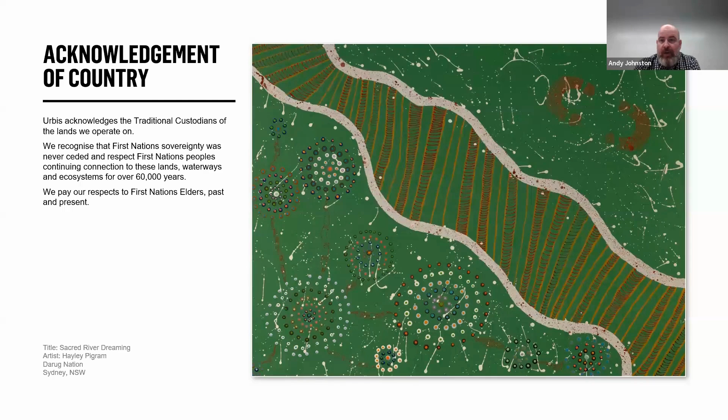So who are we? Hello everyone, my name is Supun Perera. I'm a senior research fellow at the Institute of Transport and Logistics Studies at the University of Sydney. I'm currently leading a project funded by Transport and Main Roads Queensland called TRIPS, where we are developing a national database for land use trip generation surveys. I have around 15 years of experience in the transport industry in both private and public sectors. I have previously worked at Transport for New South Wales and Stantec. I have also worked in the transport advisory teams at Urbis in both Sydney and Melbourne.

I am very much excited to be a part of this discussion today with Andy. This topic of how we transport waste is becoming increasingly relevant in light of the housing crisis we are facing in Australia at the moment. It actually gives us the opportunity to rethink how we traditionally do things and to plan and optimize transport infrastructure to achieve the best possible outcomes, particularly relating to density. So I'm looking forward to sharing our insights and getting your feedback on this topic today.

Thanks. And I can't plug the good work that Supun's doing enough. His national trip database will make all our lives so much easier and provide data at our fingertips.

So I'm a big supporter of what he's doing. I hope you guys keep in touch with him and follow what he's doing pretty closely.

My name's Andy Johnston. I've got 20-something years of experience in traffic engineering and transport planning in both the UK and Australia, most of that time in Australia. I lead the Queensland Transport Advisory Group at Urbis, and this is something we deal with on a day-to-day basis, whether it's smaller projects or huge master planning projects. It's something we need to think about and how we actually deliver solutions for the community.

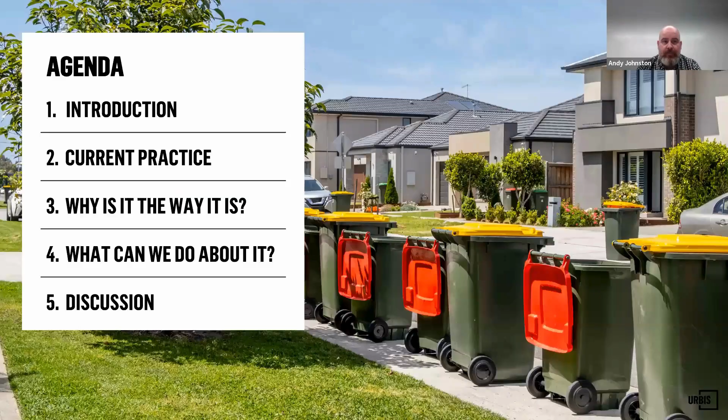We have an exciting agenda for today. We'll first set the scene, exploring how waste management fits into the bigger picture of land use planning and why it's such a crucial part of development. Next, we'll look at current waste collection practices using real project examples to understand how and why things are done the way they are. From there, we'll dive into challenges and limitations of these practices and explore opportunities for improvement. Then we'll discuss our recommendations and future directions, looking at practical ways to improve efficiency of waste collection while balancing other planning priorities. Throughout the webinar, we'll be collecting your insights via online surveys, and if time permits, we'll go through some of the results at the end. Otherwise, we'll collect and incorporate your feedback into our ongoing work, and we'll keep you in the loop via AITPM communication channels.

So why are we here? This has been a bit of a burning topic for Supun and I, and probably a lot of you as well. We design our precincts, our buildings, everything around our waste collection, and quite often it can be one of the biggest challenges you get over. But before we go into what we do and how we deliver that type of stuff, I wanted to set a bit of context about what we're actually doing.

In reality, what we're designing for is usually a maximum of 3 movements a week, less for new development or lower density developments. The median duration of collection operation in high density apartments is about 8.5 minutes. So when you look at the context of what we're delivering for, it's an occurrence that's about 0.255% of the week.

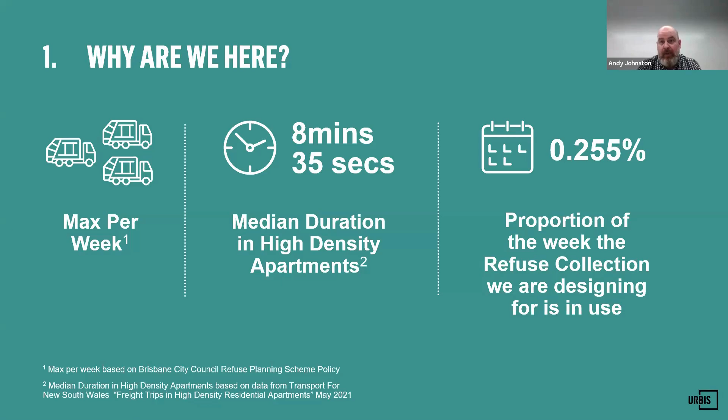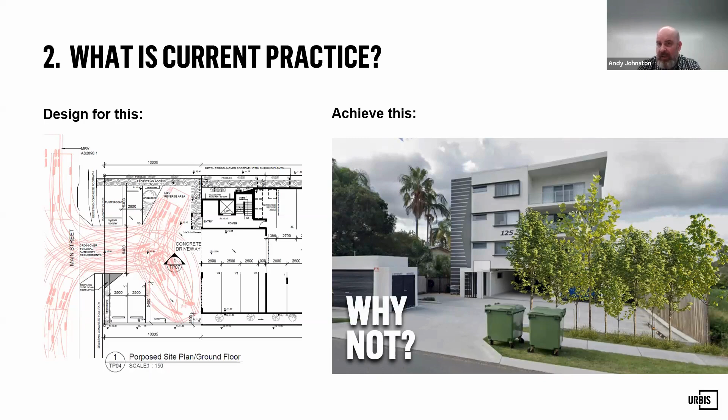So what do we do currently? Quite often we design for a large refuse collection vehicle to make all movements within a site, and we end up with a solution like this. But quite often in practice it gets collected from the street anyway because it's easier to pull up at the side and drag the bins out. So we end up with this huge expansive concrete, quite an ugly urban form. Why not have something like this to start with, and have a think about whether we need that turning on site, or whether we need this done to start with?

The reason it drives this is we have these big refuse collection trucks. They're usually between 10 and 11 meters and have a height requirement of between 3.6 for a rear loader, right up to 7.1 for the bigger RoRo compaction collection vehicles. So it takes up a huge amount of space when we have to design for these vehicles. And sometimes, do we always need to be designing for that?

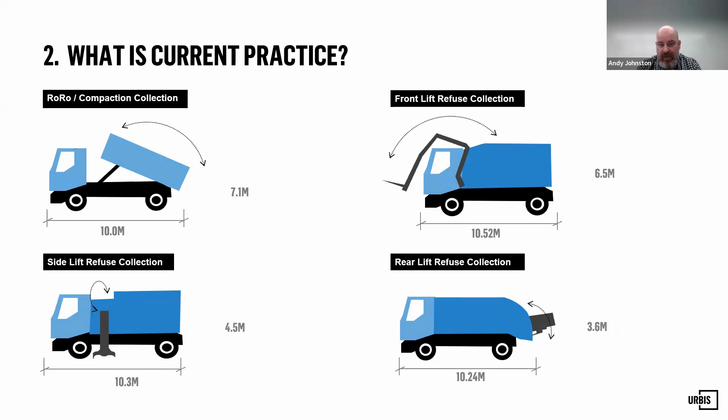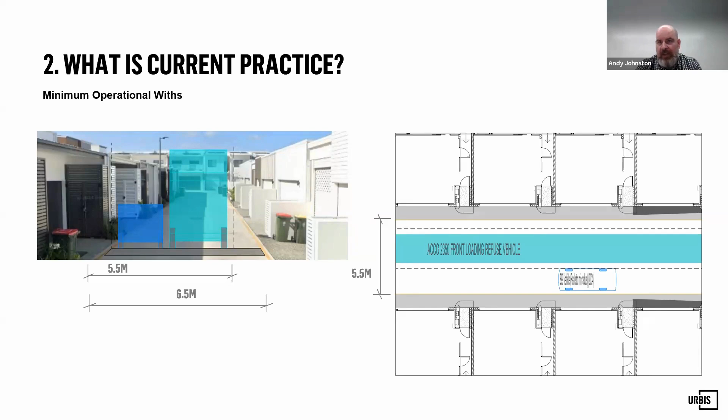As well as when we're looking at some of the urban development forms and precincts we're looking at, we tend to overcompensate for how much space we need. We need widths of like 6.5 meters just in case two larger vehicles meet each other in a laneway or a driveway. In reality, are we providing too much space? Are we being really conservative, because we always seem to design for the worst possible case? Are we ending up with too much concrete, too much bitumen, which then takes away from some of the other space that makes our world a better place to live and something we really enjoy?

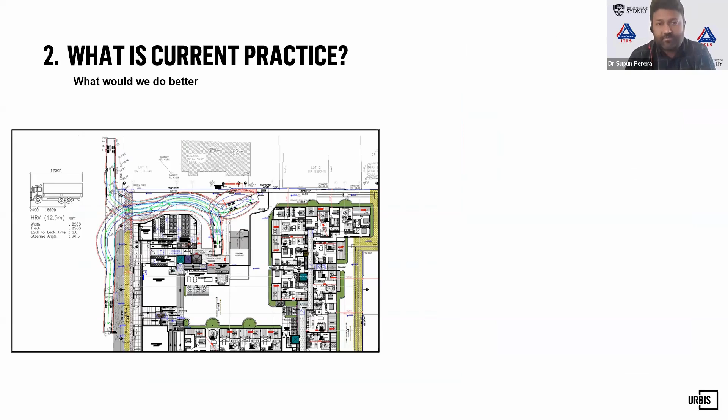Okay, good. So what you're seeing on the screen is a real project in Sydney. We are using it here as an example to demonstrate the impact the waste collection vehicle has on the design of the building. In this case, the development was requested to accommodate a 12.5 meter long heavy rigid vehicle for waste collection. You can see on the screen the swept path of this vehicle within the site. Now let's look at how the design of this building has been impacted by this need to accommodate a HRV.

First, as you can see, the crossover width is excessive. The design had to accommodate the waste truck turning out of the site onto the curbside lane. And this swept path is actually missing one piece of information, which is a 99th percentile passenger vehicle entering the site simultaneously while the HRV is exiting the site. So again, there's a lot of conservatism built into the design.

This simultaneous access for waste truck and a passenger vehicle is generally a requirement for developments fronting state roads. However, in the worst case scenarios, some instances, this requirement is imposed for sites with access off local roads. As you can see, the result is an excessively wide vehicle crossover, which impacts both visual amenity and pedestrian safety.

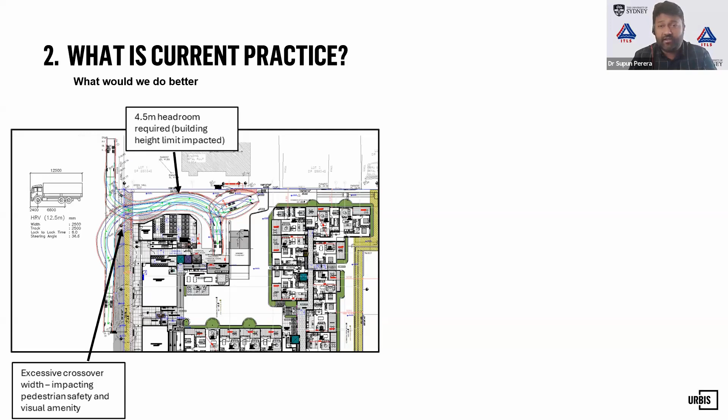Second, to accommodate the 12.5 meter HRV under Australian standard, you need to provide a headroom clearance of 4.5 meters throughout the path of the vehicle. Again, this leads to an over-design of height, and it impacts the building height limit. Unlike excessive space allocations, the excessive height allocation of a building cannot be retrofitted or modified, meaning that in future, if the building owner is capable of using a smaller truck with a low headroom clearance requirement, this excessive height clearance is essentially wasted.

Finally, as you can see, there is a lot of space that needs to be allocated for parking this large truck within the site and enabling it to maneuver so that it can exit the site in forward gear. As Andy mentioned at the beginning of this talk, this space is mostly unused. To be specific, it is only used less than 1% of the time in a week. In most cases, this space is actually usable area for something that is more important, either in terms of amenity like landscaping or density like additional habitable floor area.

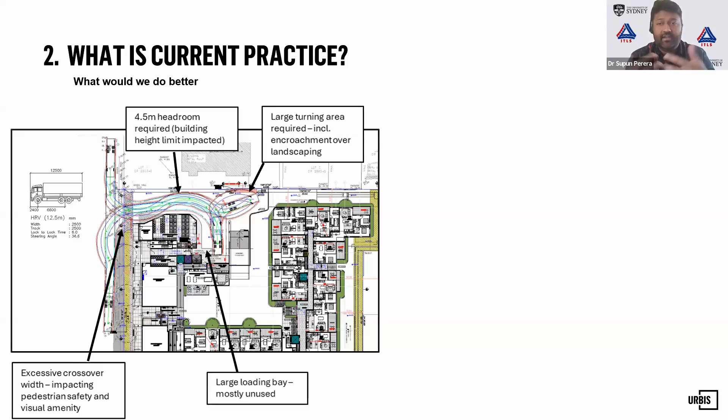I'm now showing the same building and how different the design would have been if we were to simply change the size of the waste truck from a HRV to a small rigid vehicle. I have highlighted in red the areas that can be recovered and used for some other purpose. As you can see, this arrangement leads to a more compact design with the least amount of space allocated for vehicle movements.

Also, small rigid vehicle trucks generally don't require more than 2.5 meters headroom clearance. This clearance is the same as the headroom clearance you need to provide for disability accessible car spaces under Australian standards. So when you use a smaller truck, your parking design does not have to change much more than what you are already designing to provide for passenger vehicles.

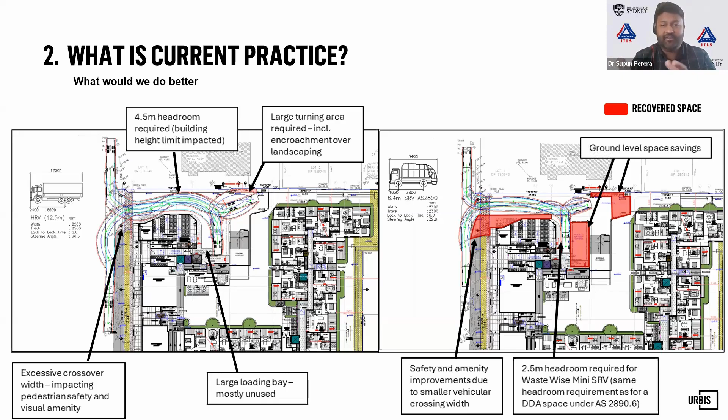When looking at these two images side by side, it becomes clear that it is currently a case of the tail wagging the dog, where the achievable development density is purely dictated by the waste truck size.

Why are we here? Why is this happening? Well, look, it makes sense when you take it through.

First of all, we very sensibly try to minimize the operational cost to ratepayers by using as large a truck as possible so we get minimal movements and vehicle turnover in a week. A large vehicle means you can collect bigger amounts of waste from many different sites. What does that mean? It means council policy then requires designs to cater for larger trucks, and that becomes the standard for what we do.

So far, all good, but then we start to see the impacts of that. Development density is negatively impacted because we get less development, more space given up to concrete, bitumen and hard stand. That negatively impacts ratepayers and purchasers because we don't get the same density. Buildings become more expensive, it impacts housing prices, and it impacts ratepayers because you're paying for these things to happen again and again. There are probably more efficient ways of looking at this so we can all share in those benefits.

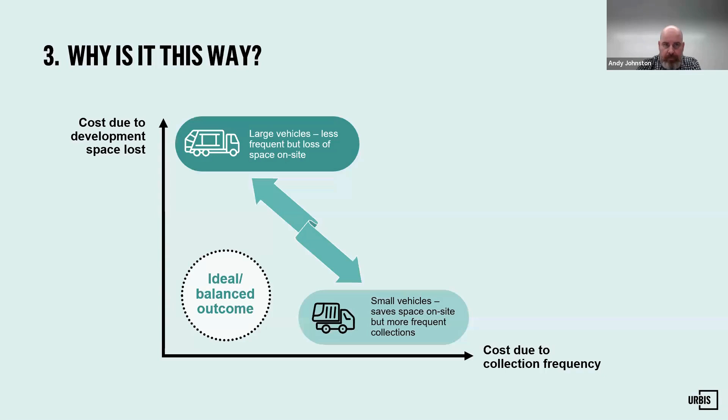Here we have captured the two key variables we are trying to balance. On the horizontal axis, we have the cost due to collection frequency. In the most extreme scenario, you use a small truck to collect waste, but it needs to go back and forth between sites and the landfill or waste treatment facility more frequently due to its limited capacity.

So the operational costs increase. On the vertical axis, we have the cost due to development space lost. In the extreme scenario, you have to accommodate a large waste truck on site, and as a result you lose a lot of valuable space, impacting the optimal density we can achieve. Between these two extreme cases lies our sweet spot, the ideal balanced outcome which minimizes both the development space loss and the cost due to collection frequency.

In fact, it is sensible to have a solution that brings down the cost due to development space lost, so ideally you'd want to be along the bottom of this graph. As you'll see later, there are ways to bring down the cost due to collection frequency over time, through technological improvements or establishment of waste transfer stations. However, the cost due to development space lost is more permanent, since once a building is over-designed, especially in terms of height clearance, there's no going back or retrofitting that space for another use in the future.

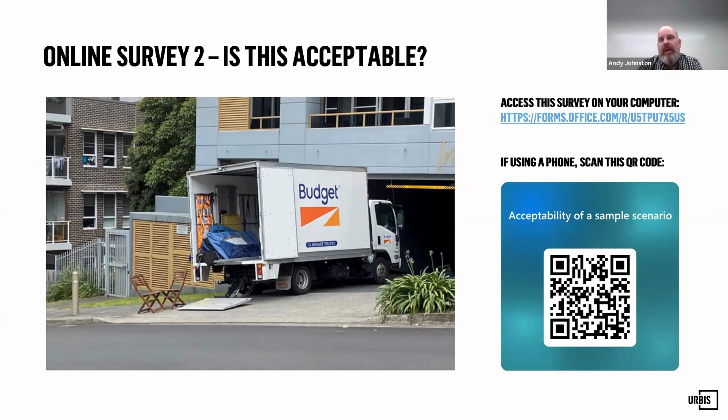So we've pulled together eight potential approaches that could be used. Not all of these are applicable to every development, so you may look at these and think, well, that's fine for that one. But it's about trying to expand how we think about things, rather than being prescriptive about what measures we can bring in.

So first of all, at the moment, most jurisdictions in Australia have a legislative levy for waste collection that local authorities have to collect. So where you have a council vehicle, you need your waste collected by a council vehicle. If you want to go for another solution where you get a smaller vehicle or a non-standard vehicle, you still need to pay a waste levy to do that. Is there anything we can do to make that a little bit more flexible, where maybe there's another way of doing stuff?

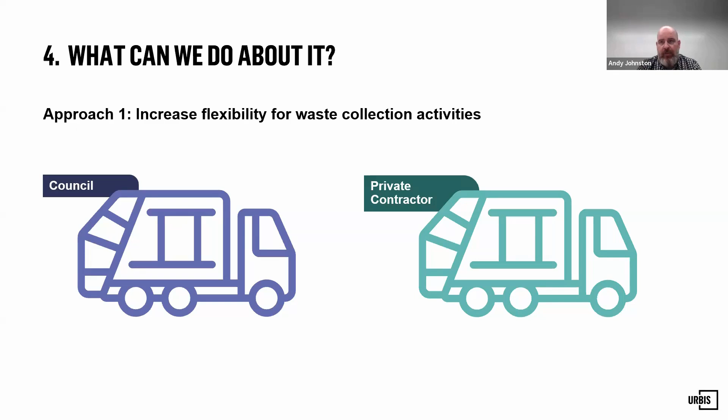Maybe we need to look at examples where someone getting a private contractor can get an exemption from paying that levy. I know some people say developers should be doing X, Y, and Z, but what I'm thinking about is things like social housing, those affordable solutions where we're really trying to push that lower end of the market, and retirement too, where a high density solution might be the difference between getting another 3 or 4 units and housing more people in a more affordable manner.

So in our research, we came across this white paper developed in the ACT titled Better Ways with Waste. In this paper, they mentioned that in the ACT, multi-unit developments had to accommodate front-loading trucks that needed 6.5 meters of height clearance. The white paper says building designers note that up to 2 units are being sacrificed in multi-unit buildings to accommodate on-site access for large waste trucks. So after consulting with the Property Council and developers, the ACT government decided to increase the level of flexibility in their waste collection vehicle fleet. They adopted a new truck fleet that only requires 4.3 meters of height clearance as opposed to 6.5 meters. So this case shows there is definitely scope for more flexibility in the waste collection vehicle fleet.

Probably, Supun, that's something where you've got councils with higher density and more unit-type developments—it might make sense for there to be more flexibility in the fleet, because you've got more developments requiring those smaller vehicles coming in, and it might help increase density, especially with the housing targets coming from the federal government. That's right.

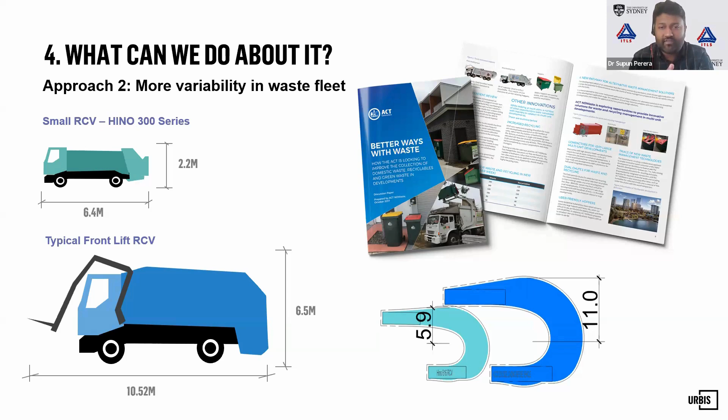So I'm showing here some examples of smaller waste collection vehicles, if you can click through. Some small waste collection vehicles access car parks purely designed for passenger vehicles. These smaller waste trucks can navigate highly constrained car parks with low headroom clearance and high ramp gradients designed on the basis of passenger vehicles. So there is much to be gained from being flexible in the waste collection vehicle fleet in terms of amenity, safety, and space savings.

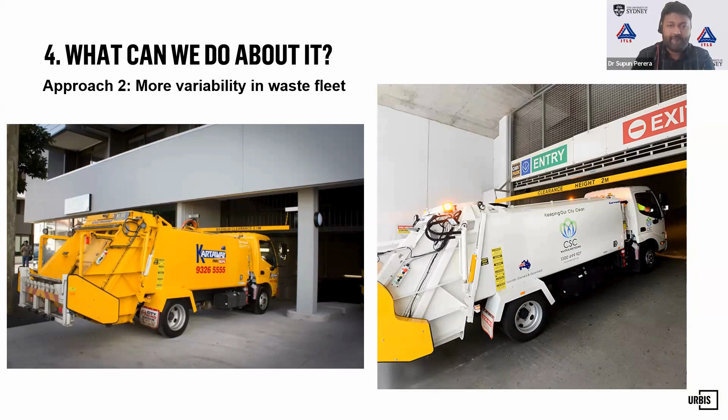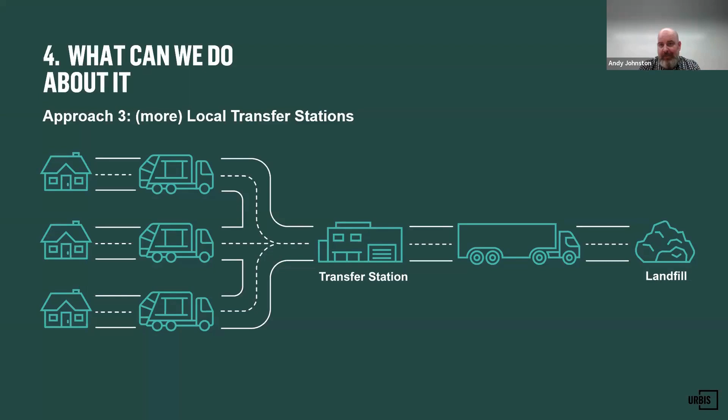One of the things we'd flagged earlier was that with these smaller vehicle fleets, you lose the efficiency of collecting from large developments, and might end up doing more runs to service vehicles. What we've looked at, and this has come up in various areas across the world, is having centralized transfer stations. So smaller vehicles come and service a localized area, take it to a transfer station, and then every so often that's serviced by a larger truck. Obviously this works better for larger local authorities who have more ability to do that, but it could also be a solution where smaller local authorities band together to get a waste transfer station that allows this kind of movement. So even with smaller vehicles, you're still not losing that efficiency.

All right, so let's now talk about the curbside. Proactive curbside management is perhaps the most important aspect for achieving a balanced outcome for waste collection. The function of the curbside in different contexts is well understood under the movement and place framework. However, what is missing in this framework is the variable of time, meaning the movement and/or place function of the curbside changes depending on the time of day.

A good example is Chinatown in the CBD. During lunchtime and evening, the laneways are busy and bustling, highly pedestrianized with minimal vehicle movement, so it's essentially functioning as a place as it's supposed to. But if you visit the same area late at night, it's full of servicing and delivery trucks, meaning the function has shifted from place to movement. So by considering that we can proactively schedule waste collection vehicle times, we can optimize the use of the curbside at the right time of day.

For example, in local roads, you could have temporary parking restrictions on collection days so that curbside collections can be done for multi-unit developments. Another reason why curbside collection is generally not considered for multi-unit developments is because you tend to have lots of individual bins from each unit and not enough site frontage to place them all and collect them all in a row.

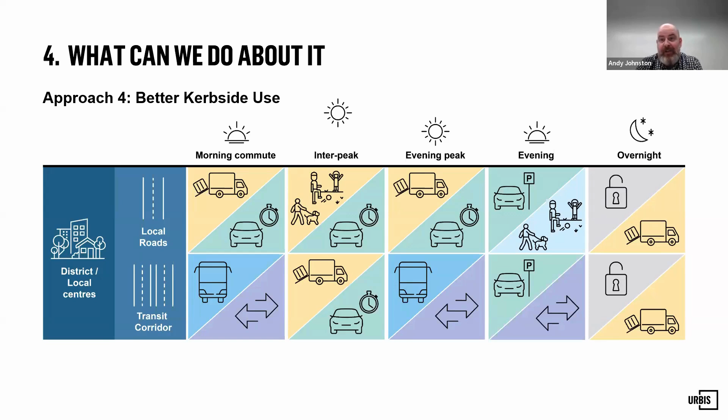There's probably a sustainability aspect to this as well, Supun. When we're trying to do more with reducing embodied carbon, actually making our road space sweat a little bit more and do more with it at different times is a really sensible way of doing stuff, so that we're not having to construct more things to do the same job, and actually use that space smartly, rather than just having it doing the same thing all 24 hours.

That's right. So that was actually a really good point, Andy. This topic is becoming increasingly important in light of the new plans we have all across Australia to tackle the housing crisis and to achieve higher levels of densities in urban areas. A few months ago, AITPM published their first policy issues paper on decarbonizing Australia's transport system. One of the recommendations in that report is on consistently challenging the need to build new transport infrastructure and instead looking to low build or no build solutions that essentially optimize the use of existing assets. So I think what we are doing here is quite well aligned with that recommendation.

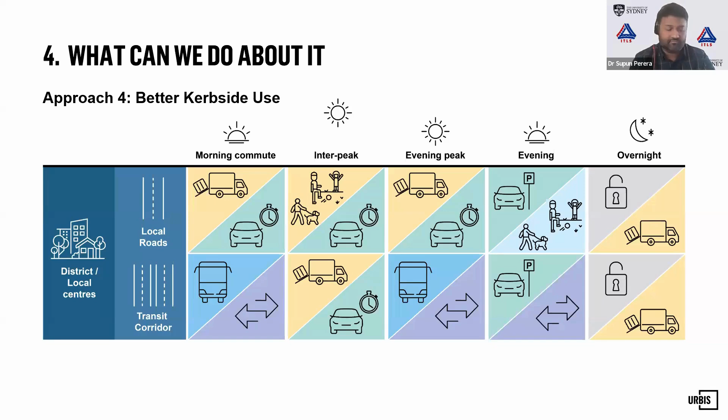Go to one that's probably a little bit more high tech. Now, this is a solution that isn't for every single precinct. It's probably not going to be something that we're going to retrofit into existing older developments, because it involves a lot of underground piping and involves pneumatic pushing and pulling of the waste collection. But this isn't as space age as you think.

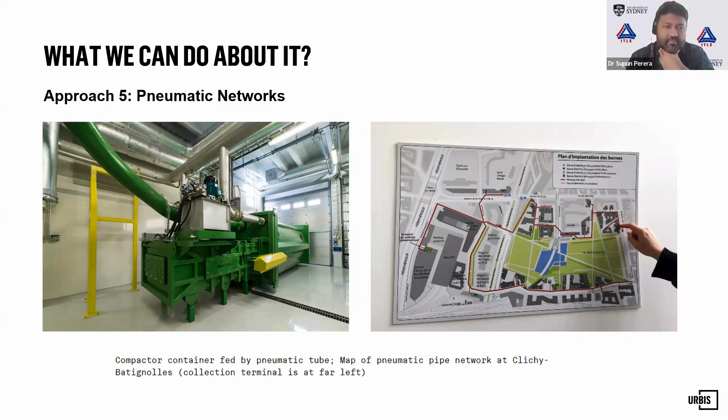Supun, is there anything else that you'd like to add to this? Not really. Didn't we have real examples of this in Queensland? Yeah, Maroochydore City Centre is currently implementing this. And if anybody online has got any solutions that you guys are seeing out there, we'd love to see them. And I think Ollie would probably like to go and actually visit some of these things and see how they work in practice.

Because in brownfield sites, it's probably not going to happen, but where we're getting brand new facilities, I know that quite often we look at precincts where you're constrained on each of the road frontages in order to get activation by pedestrians, cyclists, get deep planting in. You're starting to cut away those sort of things, and if you can then consolidate the waste collection for all of them, it's going to make things a lot easier.

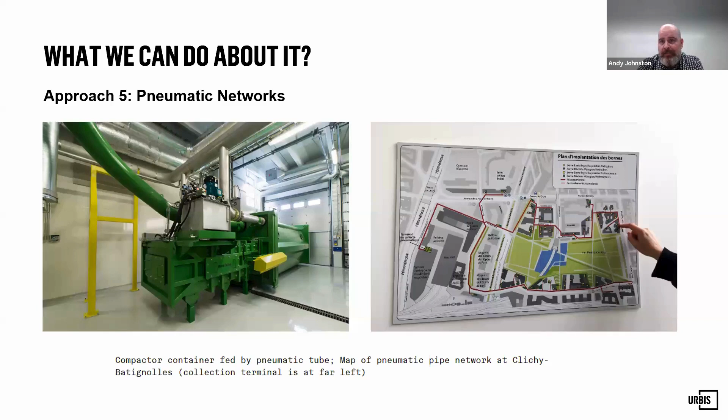Another thing is looking at the street design and being more flexible. I touched on this earlier on where we had minimums of 6.5 metre wide roads and laneways just in case. Years ago, I came across this in Manual for Streets from the UK where they looked at residential design and started to look at, well, what sort of space do we actually need for various vehicles to be able to manoeuvre through street networks and do these separate things?

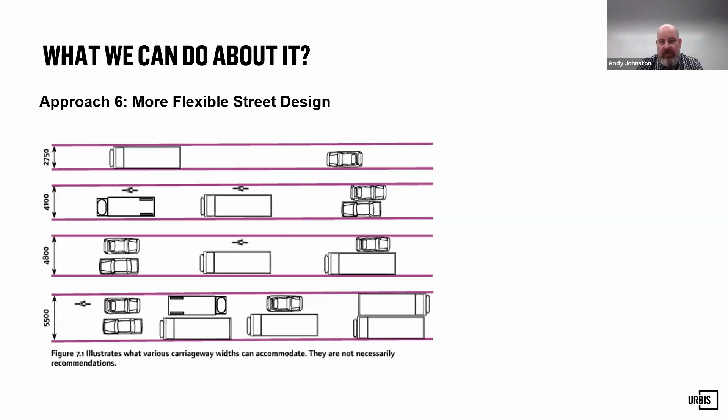So there's one pretty close to where I work in Brisbane, and this laneway that I go past pretty regularly, it's about 3 and a bit metres wide. It's really, really tight. And you would look at that, and it's also a dead end. It's not a through lane either. And you would sit there and look at that and go, well, obviously everybody in this laneway gets service from the street. There's no way a waste collection vehicle would get down there and be able to manage that.

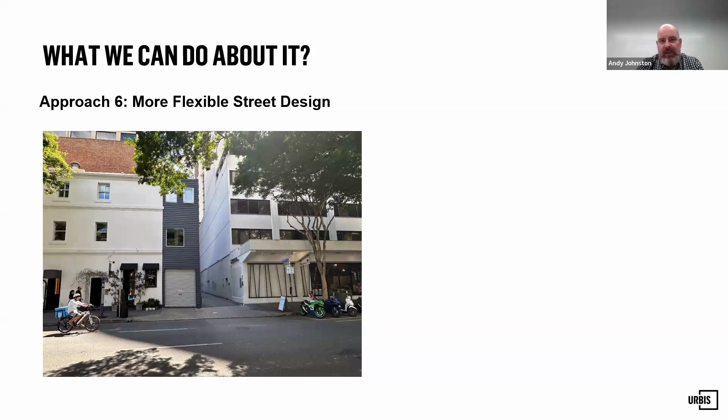Until one of my team actually did a project for the reuse of one of these buildings here, and they managed to get a hold of some CCTV, which shows that down this laneway, all the waste actually gets collected from the street, and this is CCTV of a council waste collection vehicle coming down there and picking that up.

Now this shows that even with not changing the waste collection vehicle, not looking at any innovative standards of doing stuff, just with actually thinking about how we could manage this and managing that in a timely manner so that we're not doing this in the middle of the day, that you're coming along very early in the morning or later at night, you can actually service these really tight, constrained areas.

So it's worthwhile taking a step back. Often we sit there and go, no, it doesn't meet the standards, let's move on, we need to find another solution. Sometimes in places like this, where we're not able to go and find another solution, you need to go back and say, well, do we need to look at our assumptions again? And those assumptions about not being able to do this are obviously incorrect.

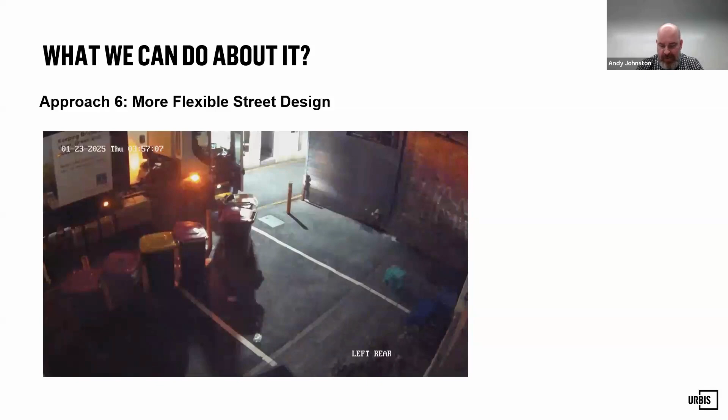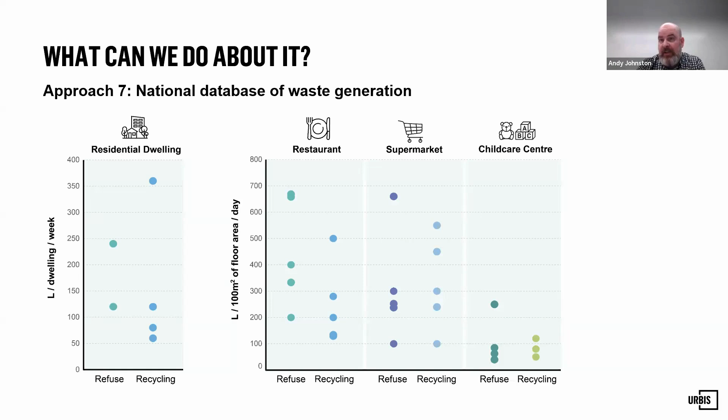And I think, Supun, it'd be great if the TRIPS database that you're looking at could actually look at stuff like this. And I think it'd be really helpful for us as an industry if we could have a national database that we all trusted, that we could go to and just look at these sort of rates for different types of developments. Great point, Andy.

Thank you. And just a side note before we move on, many of the current development approvals are informed by how existing similar developments operate. This, I think, is not a sensible approach because it keeps us trapped in the predict and provide mentality, looking at how many waste trucks of which size are being used in current developments and using that to inform future developments.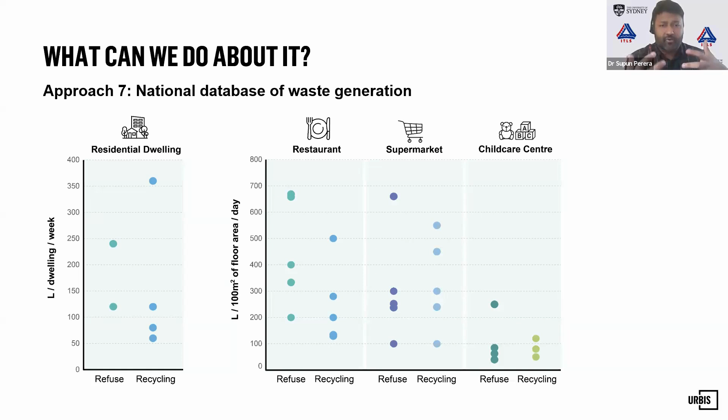It would be better to go down to first principles and look at exactly how much waste is likely to be generated by a given development, and then formulate the best way to collect this waste. I think that kind of approach lines up quite well with the vision and validate framework we are all trying to move towards in transport planning practice.

Okay, so let's look at neighborhood scale collection points. The traditional door-to-door collection by individual buildings tends to maximize the number of truck stops, the number of truck trips, vehicle kilometers traveled. So anytime waste can be aggregated between buildings or between different businesses, in fact, in the same building via push carts or small electric vehicles, the environmental and public health impacts can be minimized.

And this kind of solution should be planned for at very early stages of a large precinct development to make sure waste containers are located more centrally at collection points that can be easily accessed by everyone and takes into account all the key considerations that relate to everyone in the precinct.

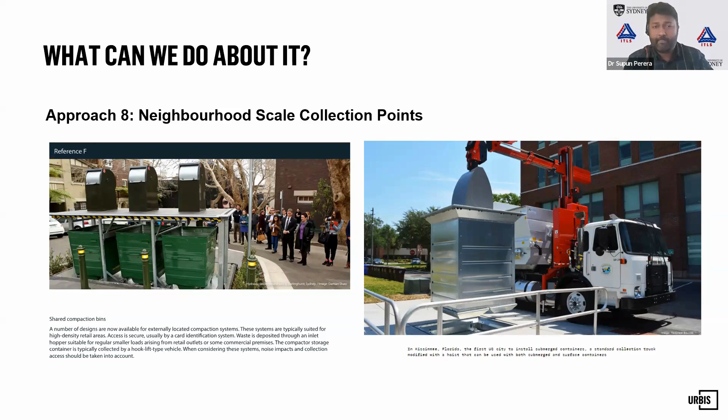Interesting, Supun, because you talk about this being quite futuristic. If you go to Europe, where you've got a lot of tenement buildings and things like that, you have lower tech solutions like this, where everybody has big bulk bins at the side of the tenement buildings, where everybody takes their rubbish out, puts them in there. This is really providing a more sanitized and better looking example of that, where the big ugly bin is hidden below the street. It's actually going back in time, a more traditionalist approach to doing that sort of stuff.

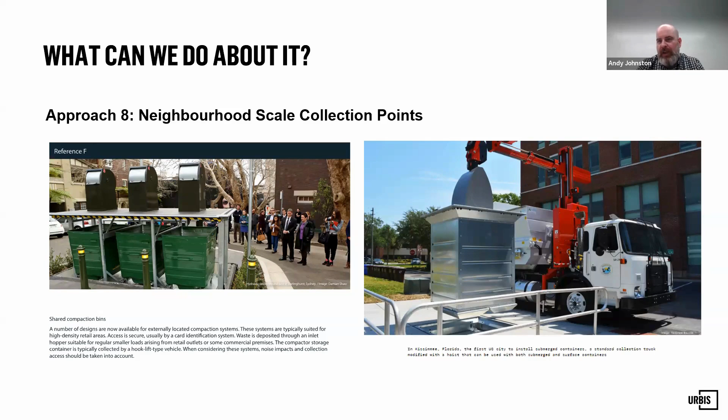Yes, it means you need to go out in the rain to put your bins out, but as someone who frequently does this, because these bins are stored outside, I usually survive the few spots of rain that drop on my head when I'm running out in my slippers.

So, how can we improve our approach to waste collection? You've listened to Supun and I's ideas. I'm sure, given the wealth of experience we've got on this thing, there are a lot of other solutions. So Supun and I have created a few questions that we'd love you all to put forward, because while we've pulled together 8 solutions, I'm very sure that everybody in this call can provide a lot more than that, given the experience and different backgrounds that everybody's got here. We would really love for you guys to fill this in, because I think this is really interesting for the industry. Do you want to run through the questions, Supun?

I do. Erica, do you mind dropping the link to this survey into the chat? Essentially, it's just a single question and you can do a long form answer. It's asking how can we improve our current approach to waste collection. So we are open to any sort of ideas, and we'll go through it after this talk and review them and sort of come back to you with what we think. And also, if you think we're perfect, with no need to change at all, put that in. We don't want to lead anybody along to any solutions. We want honest feedback and honest answers.

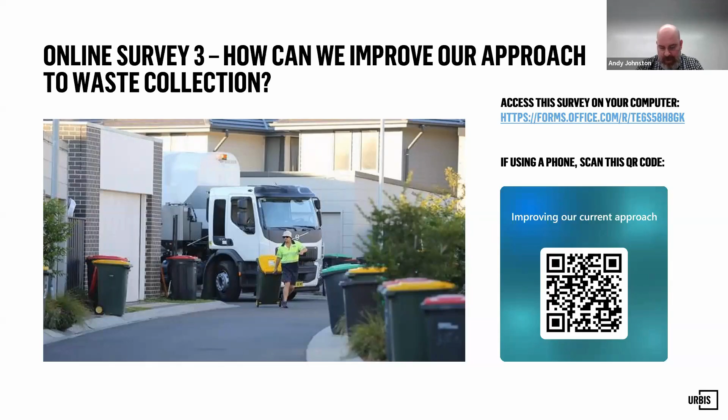So before we go through the collation of some of the questions, we just thought we'd conclude on what we were doing here and what we came up with. Look, every site is different. Every local authority is different. Every place is different. There isn't an easy tick box for every single situation. We need to find solutions that work for each site on its merits.

And in order to do that, you need to be a little less prescriptive, where stating you need to do X, Y, and Z sometimes doesn't give us the answer, because sometimes X, Y, Z provides us with something that, while it ticks a box for refuse collection, may have negative impacts for everything else. Is there something that we can do better that has a better holistic outcome for everybody?

We need to understand where we're making those different solutions or looking at things that are done differently. We need to understand what we're trading off against, and are these impacts positive, are they negative? And have a realistic view, not always thinking, well, if the worst thing happened, then therefore we can't do this. There are always solutions.

One of the things we quite often see coming up against is, well, what if somebody's parked on the street when a waste collection vehicle comes along? Well, there are solutions to that. Parking restrictions, towing vehicles. If you get your car towed once because you've parked in front of where the waste collection comes along, you're not going to do it again. Well, not unless you've got really deep pockets.